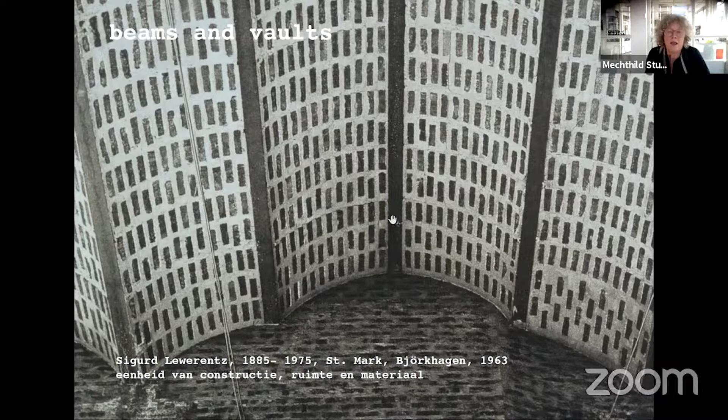He used beams and vaults and tried to understand fully what it means to use a kind of material, and try to understand what the material can do and what it can't do. And then he developed his architecture from that starting point. This is one of his churches in 1963. He was an old man already by then, in his 80s. And this was his last building, a full concrete building.

Here he experimented maybe for the very first time with making architecture with sheet materials that are basically atectonic, not tectonic. And we found that utterly fascinating. So when we got our very first chance to build something, we did an homage to this particular building because we had discovered a building material or technology that was not yet known in the Netherlands. Nobody had used it. Somebody had heard about it, but we saw it in Austria. That was this wonderful new development, CLT, 20 years ago, 2001, Rotterdam, cultural capital of Europe at the time.

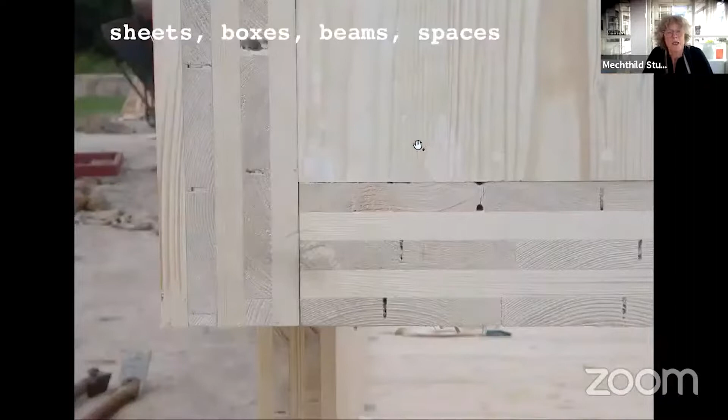This building is a little timber homage. We tried to understand what Lewerentz did. We tried to translate his concrete architecture into timber and explore shapes and forms that would only work with this particular technology. We understood these solid elements that you all know now, CLT, everybody knows CLT now, at the time nobody, but we had to find out how that actually works.

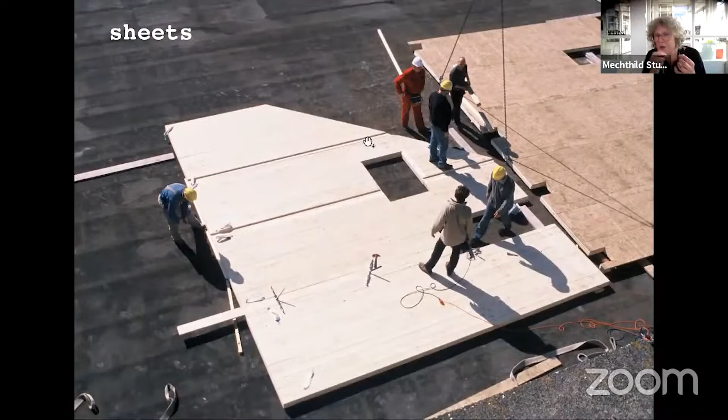We were thrilled by this discovery that you can make solid three-dimensional objects. They were completely stiff, and that could lead to a completely new kind of architecture that would get its stiffness, its stability from the way these sheets are put together. No structure and beams, no loose elements, but something that is as stable as a model you would make with gray card.

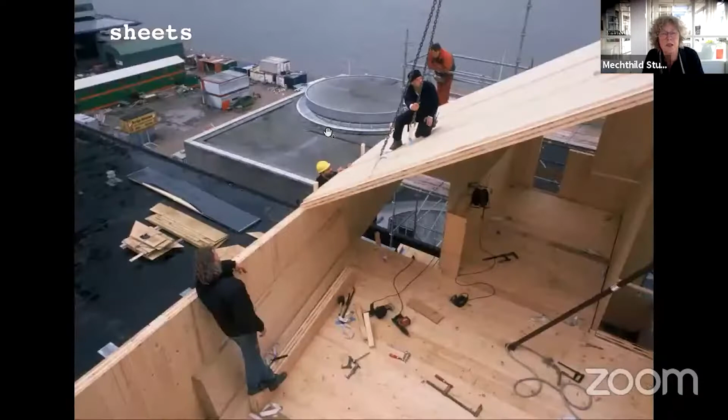It was this sensation, also this sensation that this actually felt like model making in full scale. And those four men, we still know them even after 20 years. They were thrilled at the time together with us.

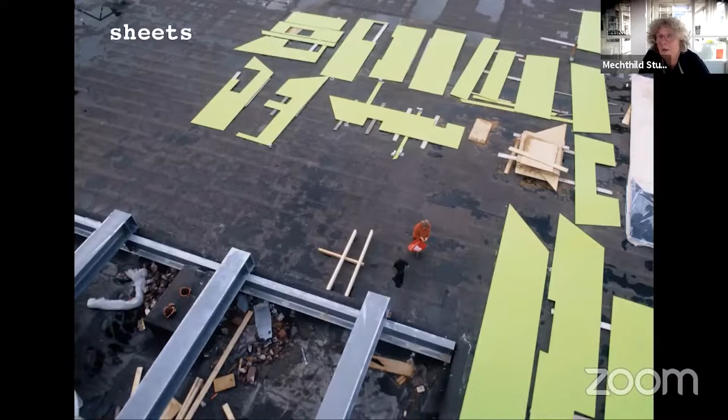The sheets, that was quite literal. We could put them on the floor and could see what was happening. And these sheets are also interesting because they were Kerto, not CLT. Kerto is a plywood, finished plywood. You can see the enormous sizes we could get. The Kerto was new on the Dutch market, and we got it for free, and that's why we did our cladding with the Kerto. And you see this quite complicated structure that was possible.

This geometry was really only possible with this sheet material structure, stiff structure, and then as a result, the spatial quality was something very distinct, not tectonic, no rhythm, no modular dimensions, a free form, a free geometry, a sort of shell where structure and space were one and the same thing. And that was exactly what we admired in the work of Lewerentz.

It was a stiff little symbol, a temporary building, an experiment, an introduction of a building technology that everyone who's now using it has, of course, long forgotten. The whole area is completely developed, but we kept it, of course, in our brains, our hearts, and it has actually shaped us as architects. It has become a very stiff thing and we profited from that. We could cut off the big staircase and ship it to its next temporary location.

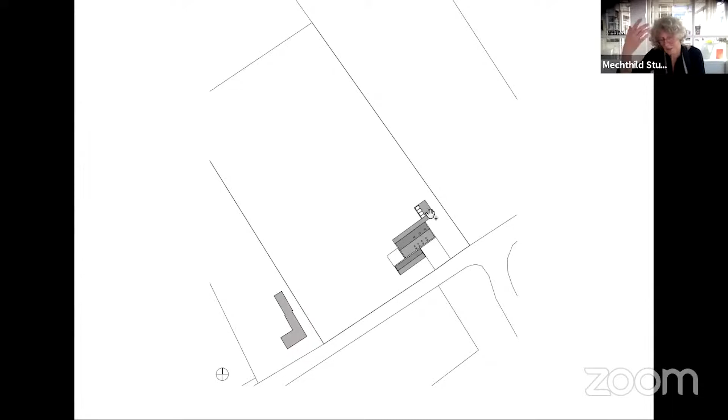A very simple little diagram of how this house has been built. Indeed, a small house in front. It's as small as all the other houses as well. A larger one in the back, and the third one, that is a little sauna. It really has been built with that.

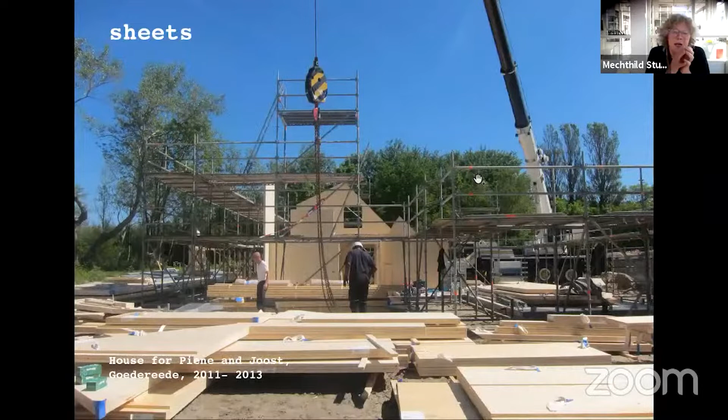And again, a very similar photograph as 12 years before with the Parasite Las Palmas. The same carpenter, still one of the few specialists of CLT. Now there are many, many more. The same guy we saw 12 years earlier. A big place where the whole assemblage of the CLT elements arrived. And a very interesting, in that case, also international collaboration.

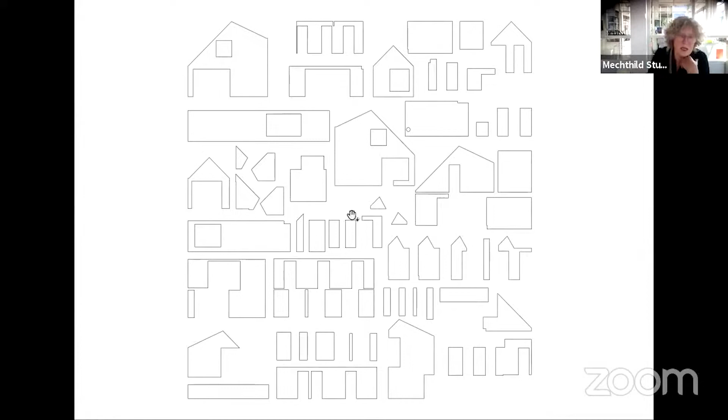The CLT sheets that make our spaces, we conceive them, but the carpenter actually draws these kinds of diagrams and really thinks in what kind of order he wants to assemble the whole thing. And then sections that were developed with the idea of spatial quality and that followed the properties of those materials.

It's a very three-dimensionally conceived house, where you see that the quality of the finishes is much less rough than in the Parasite. At that time, we didn't know the difference between the different qualities of smoothness you could order. And we knew that the timber would be overwhelming if we only used timber. So we complemented that with built-in furniture and smooth floors without a material expression.

A framed space where the absence of tectonics is used to shape the space. I think that's quite a special thing, that in CLT, you don't feel what is carried by what. It's just there. It's quite a pure space. And sometimes I find it also almost irritating that there is actually only a solid kind of mass. And we feel that we have to complement it with something that is more readable to make people feel this particular quality of CLT.

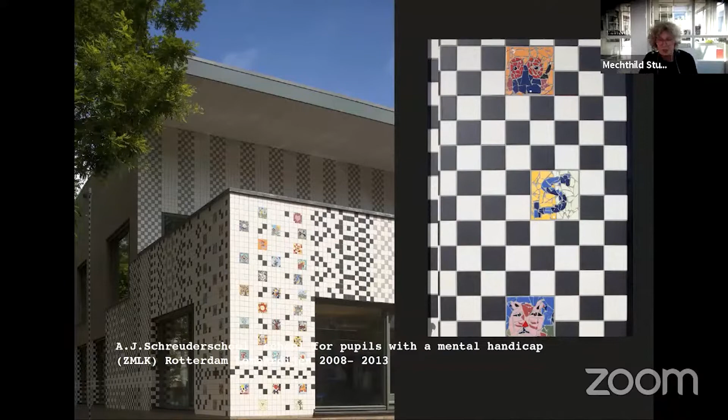It's a proud school meant for people who are usually not proud of themselves. That's why we put a big name and artworks of the pupils on the facade. But that, of course, has nothing to do with timber.

It's also a very simple plan, a very compact plan that had to do with the mental disabilities of the pupils. It had to be extremely clear and compact.

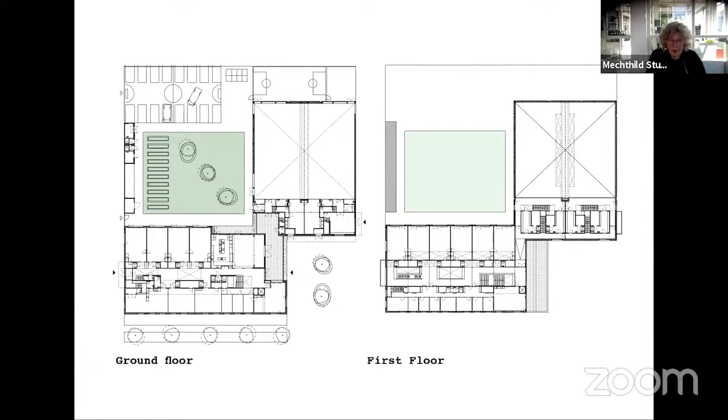So a corridor, for instance, on the first floor had to be narrow, and you were only able to go from A to B on that corridor, but still it had to be light and spacious and calm, and with very, very good acoustics. And the timber helped us with that.

Here, the sheet material was not enough. Not only because we have larger spans, but we need scale and rhythm and readability for this much larger space. And in the combination with the daylight, that structures this space.

So using beams and, in this case, hollow core roof elements, we shape the architecture, and the beams help us to bring the daylight very, very far into the building.

So if you see that, it is not only this photograph, but it is important to understand that the beams are not only a rhythm in the structure, but also that they structure the light. That's maybe more interesting than the structural properties of it.

Here you see four ways of using timber. Laminated beams, a very traditional building system. Hollow core elements that you probably know after your workshop. Lignatur in this case, perforated for acoustic absorption.

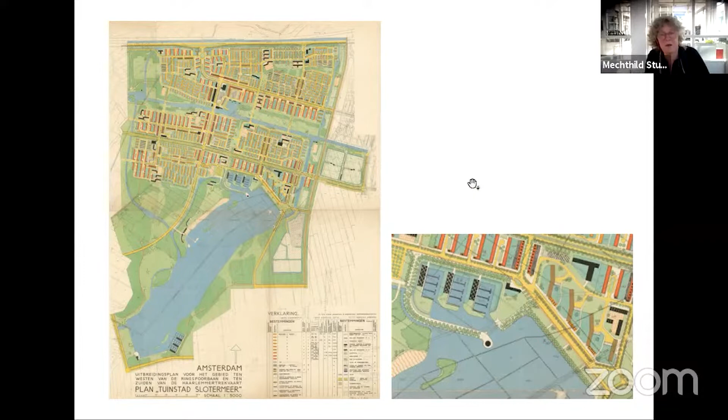Here you see the same location, this little angle here, an angled pavilion, a little building that would somehow end the axis on the lake and make the transition to the other geometry of the yacht harbor at the west. This is how the location looked when we started. It was just a dark, dense, almost solid piece of vegetation. Not much quality actually, and a little bit scary, especially in the night.

But we felt that we had to make an homage not only to Van Eesteren himself, but really also to the place. So we wanted to fit in, to hardly be seen. So we made a dark thing, like the Maidorn bushes, like the little trees. And we just do something that would not overshout. It would fit in the trees. So if you pass by, you notice the building only when you're close by.

The white modernism of the time has been replaced by black modernism because the trees have grown and we are now part of the trees, but we refer to white modernism. This is, in my opinion, maybe the nicest modernist building ever built. It's a celebration of tectonics. It's a celebration of what concrete can do. It's a celebration of light and rhythm and a combination of tectonics and nature.

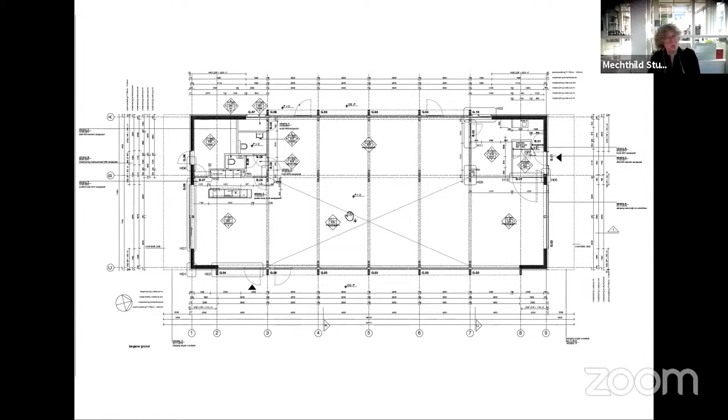And with our own innovative building technology that we have now, our own new timber technology, we can actually build modernist buildings and still be warm and contemporary. We also found this one, also an interesting reference. It's all by the same Norwegian architect, and there we went. So we made a very, very simple plan for Amsterdam, a low bay and a high bay, and it's so neutral that we can make an exhibition pavilion. It's quite simple, but the simple geometry gives a lot of space for the timber to literally shine.

Here you see what we did. We have large laminated beams and cross beams, and in between we have hollow core elements. Here you see them in section. You see the little chambers. You know the system, and you know also that one is able to perforate them. In this case, that is not Lignatur with round holes, but it's Lignotrend with slots. That's the difference. You see it in the texture here.

So this timber building, from inside, appears much larger than it looks from the outside. It's a celebration of timber. It is a celebration of new technology, like Van Eesteren would do. We use what is at hand at this very moment, but we do it in a sustainable and contemporary way. And like that, we can celebrate this architect, but also build on his legacy as someone who is innovative, always has been innovative.

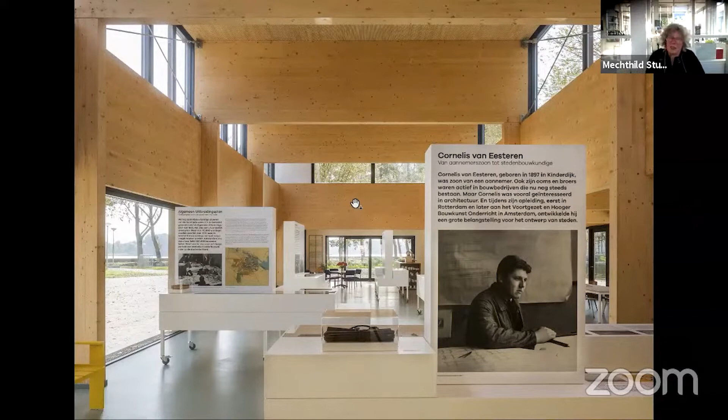He embraced prefabrication. He wanted to give light and space to everyone. He wanted to make affordable housing. He wanted to make a really, truly contemporary piece of the city, and that we had to celebrate, and timber helped us. Timber was also symbolic in that. And then you leave it, you have experienced timber, and then you are again part of the modest surroundings and the trees, and that is what this place is about.

And then this is a piece of continuous architecture, continuity where timber plays a key role to achieve this. And here, looking from inside out makes these people understand their surroundings. And that was what this was all about. I want to end with one more project. I have many images of that project, but it's going rather quick.

And here, all we learned about sheets, panels, slabs, boxes, solid timber, innovative timber, CLT, hollow core, cladding, and traditional structures come together. And that's why I dare to place it, even though it's not only about timber. It's also about that we use existing buildings. We have so many of them, and if we deal with them in a good way, the scars will always make the building more beautiful. And the longer it lasts, the more beautiful it gets. So I love this reference to kintsugi.

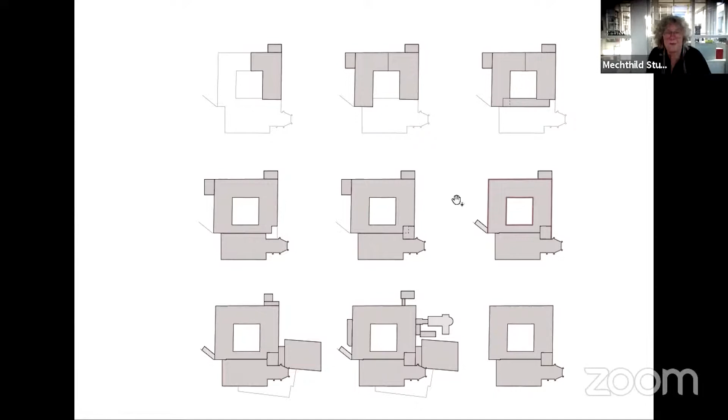Here you see, without the need to understand it all fully. It has a very, very interesting history, this building, with many alterations and many additions that were all, again, demolished. And then this is how we found it, but all the scars have left their traces. We saw it like that. And because it is a timber structure, basically, what you see is a very, very big roof. It has an enormous impact in the interior.

Yes, we still don't see any timber, but it is in there. Wait and see. On the ground floor, there is no timber. Vaulted ceilings, all brick, in a relatively good shape in some places and very bad shape in other places. On the first floor, you see already that it is a timber building, and that the timber still is okay, but everything else is decayed in a very, very extreme manner.

And then we come to the attic, where you see that the timber is actually the most, not only sustainable, but also most durable material, because that stood completely upright, proud. It's a very fantastic attic. They knew how to build with traditional means, but in almost a very grand manner. They hardly used this attic, but I found that very, very fascinating.

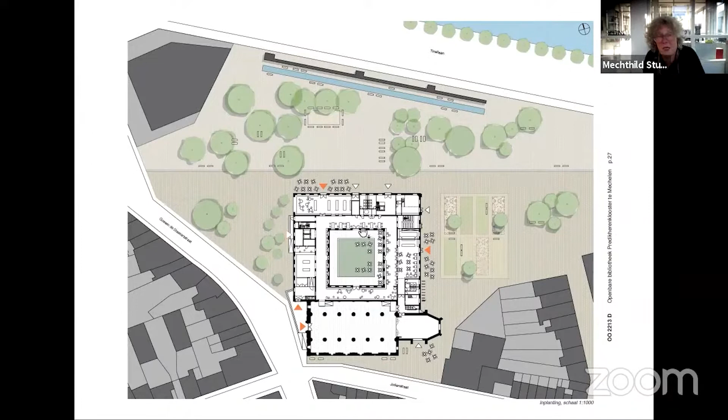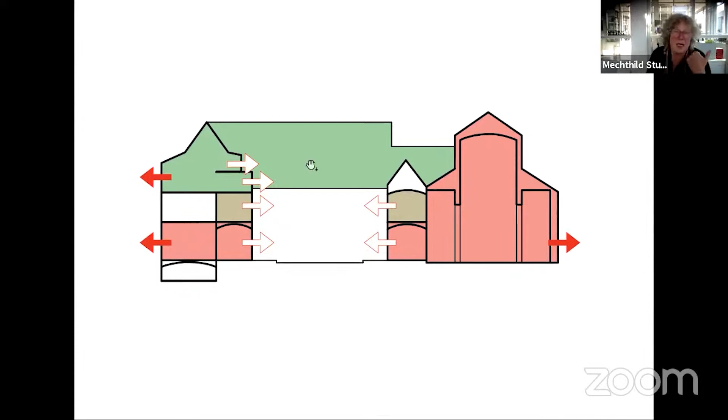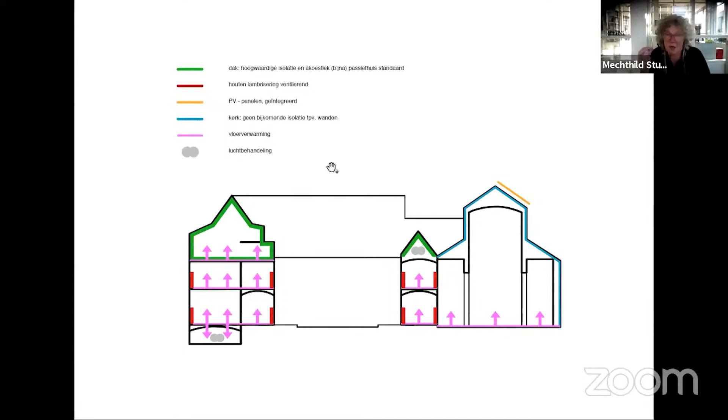And the good thing is that this whole diagram can be translated also to an insulation diagram, that the timber attic that sits on top can be insulated after a renovation and achieve passive house standards, where the stone parts are much more difficult to handle. We had to be very careful physically, so we hardly were able to insulate at all.

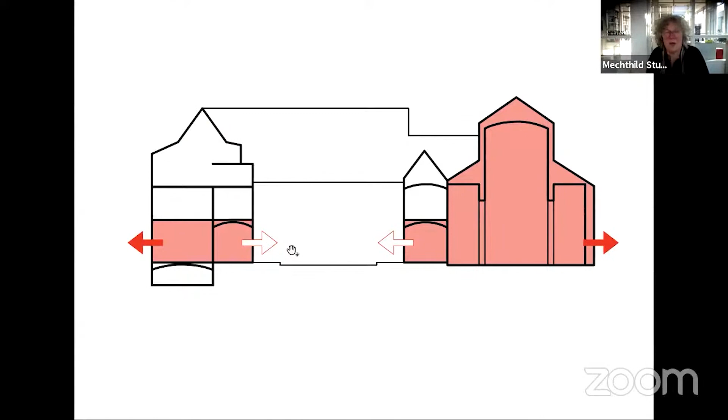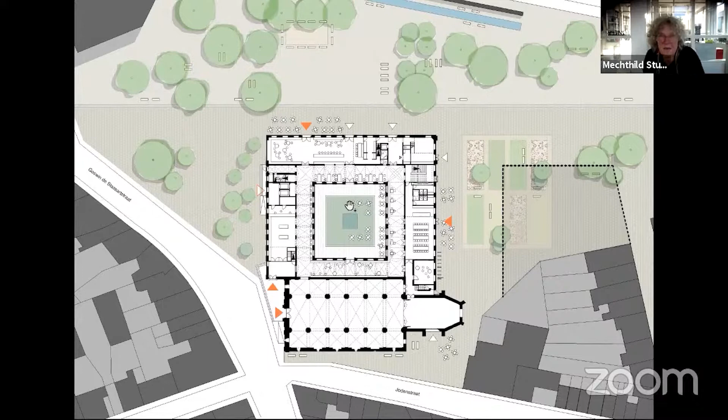I go with you to the building and start with this public zone on the ground floor, including the church. Again, the plan, where later on you see better how the plan changes from a stone plan to a timber plan, and that's why I put those plan drawings in the presentation. And you see it here. The yellow ones are the structures that have been taken away, but all the dimensions really have to do with the spans, the possibilities of the time, and that is directly linked with the possibility to build at the time in timber.

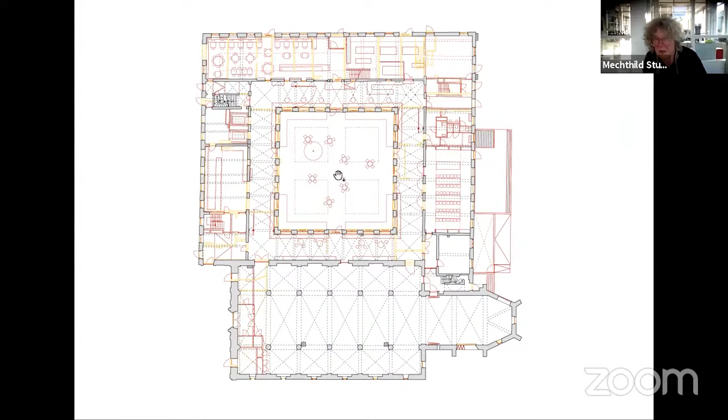The spectrum of new materials to bring in: we have solids, laminated, CLT-like structures of 3-layer plates, and the non-load-bearing ones that are the panels that guarantee good acoustics, and all kinds of other things and colors that are not so interesting in this presentation.

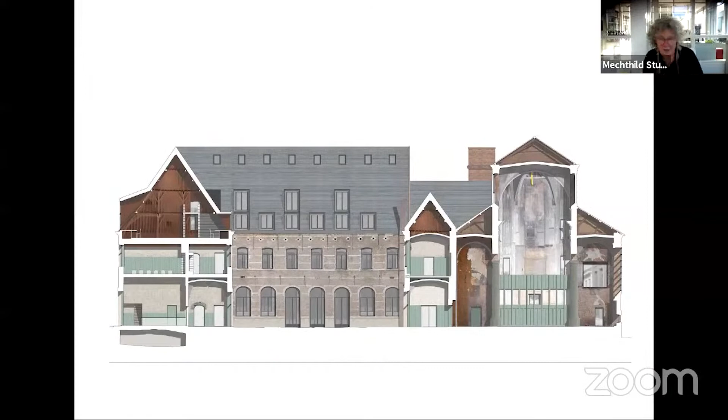But here, this competition section shows up. You have these beautiful big attics, solid timber, and then the stone building in between, underneath, and the stone walls have been lined with ventilated panelings. So the paneling was a tool to integrate installation, to integrate warmth, comfort, acoustic and thermal comfort.

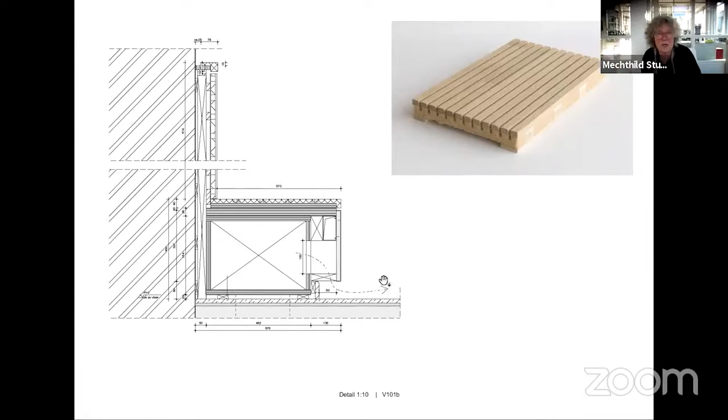In these benches, we could use our entire experience we have with the timber. And here you see this beautiful product, Lignotrend, that derives directly from the load-bearing systems, but it's much smaller, very elegant, and very easy to use, and that exists in all kinds of timber species. An oak bench with the oak paneling gives a beautiful acoustic, also in these hard spaces.

Again, you see the integration of techniques, and you see that it serves the space, but also serves the atmospheric quality of the space. Different wings, different building faces, slightly different vaulting, but the use of timber binds them all together. So we use the timber as the red line that combines all the floors of the building, all the characters, all the different wings, and all the stages of decay that you see here.

In this wing, there's hardly any plaster left. In other wings, we found this kind of heritage that we found fascinating. Of course, it's not usually regarded as being valuable, but we thought it was so stunning that we also left that, and the timber lining we brought in was subordinate. And we even colored it, partly; also that's Lignotrend, in this case a softwood, with this non-load-bearing acoustic paneling that helps us very much to control this space.

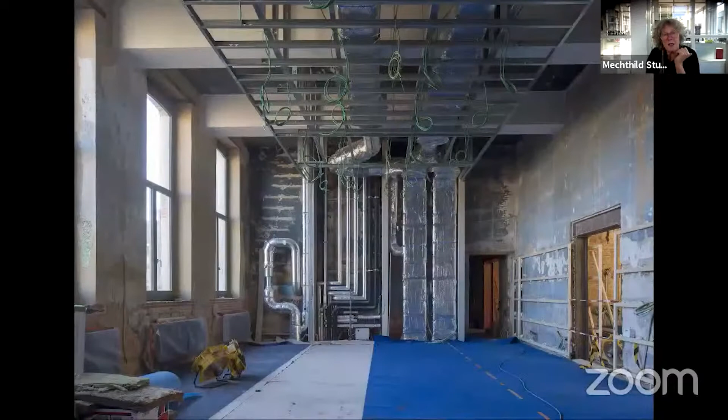The former gym, that was blackened due to fire and decay, had to hide the installations. Also, that's what you do as an architect. And then you use your repertoire of timber to conceal the techniques. So here we have again Lignotrend, but then in a sort of washy blue color.

And that has to do with the fire regulation in Belgium, that in these larger spaces we can only use softwood, because hardwood would become so hot that an oak paneling in this space was not allowed. We can talk about it a little later. There are quite specific properties of the timber. We have softwood paneling and oak doors here.

Here again, an oak panel to cover it up, softwood in a color, and then the wall that has been preserved in its very interesting blue stage. Also, these kinds of collages we enjoy a lot, and the timber, of course, helps.

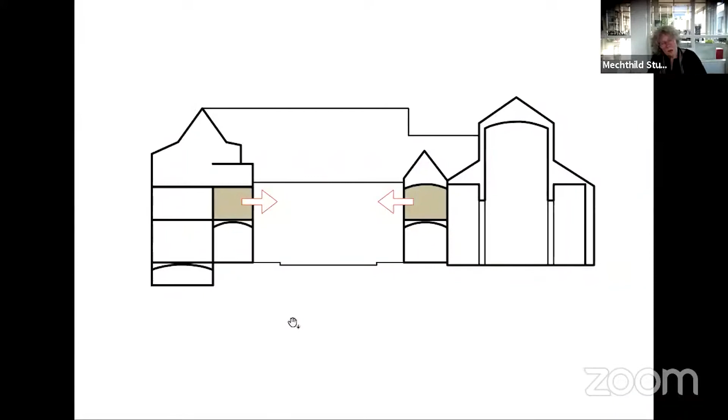Now we go one floor up to this little floor, that is the most intimate floor. And here you see already how the drawing becomes much more delicate. And that is because the attic has a timber ceiling, even though initially we didn't see it. There's a vaulted ceiling only here, and timber ceilings in all the rest. But time has almost eaten the traditional structure, not necessarily timber.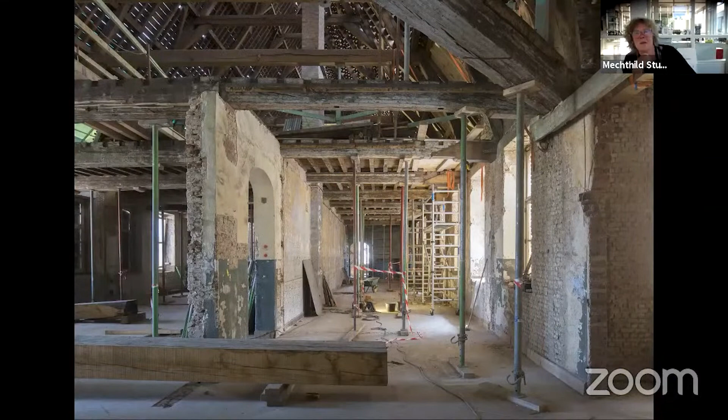And under the false ceilings, we found a wonderful composition of decayed and well-kept beams, all oak, that were already temporarily supported. And then for the restoration, we almost had to dismantle the entire building, and then the timber had survived 400, 500 years, which was remarkable. All the rest was in much lesser shape.

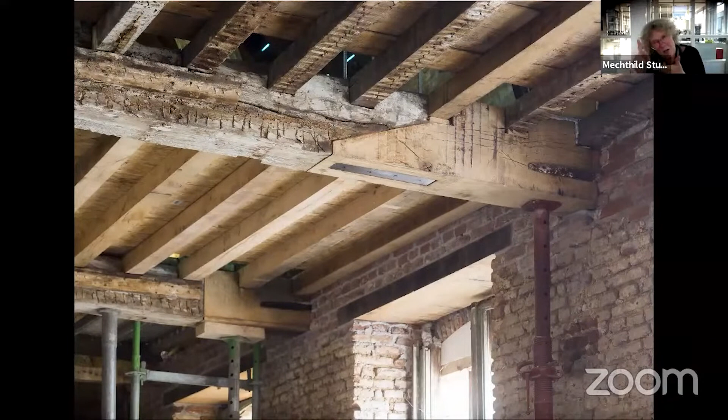The walls had been moist. So the heads of the timber beams had been soaked with the moisture, which was very dangerous. We had to replace all the heads of the structure. An interesting process, but still the atmosphere was kept. That was when it was still empty. So you see many repaired heads, many repairs, but still the timber ceiling was wonderful.

And then later they started to use it. And timber makes the atmosphere, makes the light, makes the acoustic, makes also the sound insulation between attic and this first floor. Here, the room in the corner with these monumental beams, some smaller beams, innovative insulation panels all together.

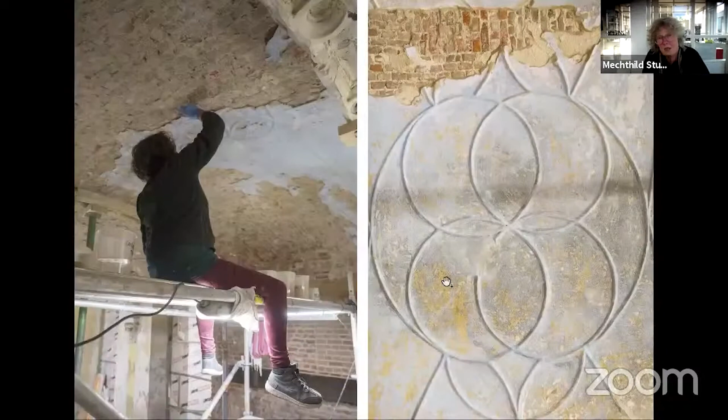Again, a few atmospheric images before we go up to the attic, which is actually the most important thing. Still, the monastery library of the monks, vaulted, had suffered a lot from decay, from moisture. Five years ago, it still looked like this. We restored it very carefully, but didn't reconstruct any ornamentation. And then the timber furniture accommodated also ventilation pipes.

You see that on the bottom. It's all in there, and acoustics on the wall. Also, that gives us a little thermal comfort. And now it has been accepted as almost a public living room to study there.

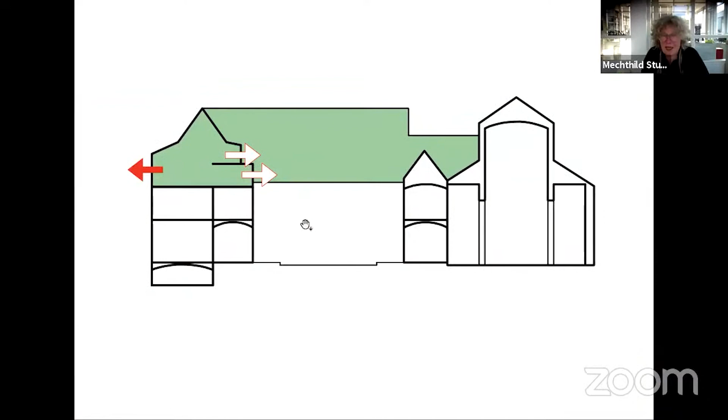The last floor, also the last project I show you, is this attic. See, again, the plan, very, very delicate. It becomes thinner and thinner and thinner if you compare it to the lower plans. And that's because of the timber. We introduced a mezzanine, and I just show you the images. This is what we found. And if you see the broken down, the rundown monuments, it is remarkable how well it was kept. So timber structures can last for a long, long time.

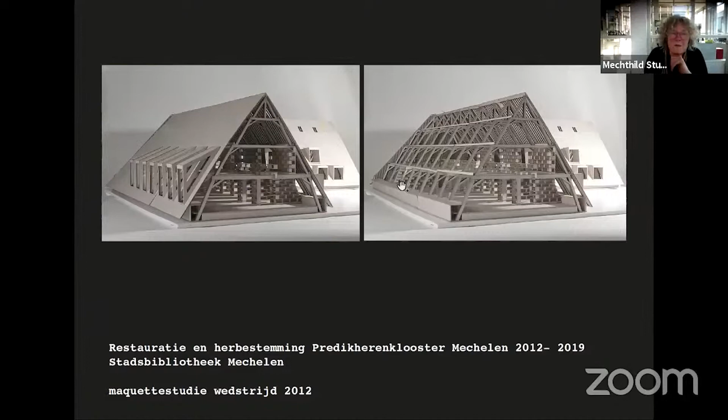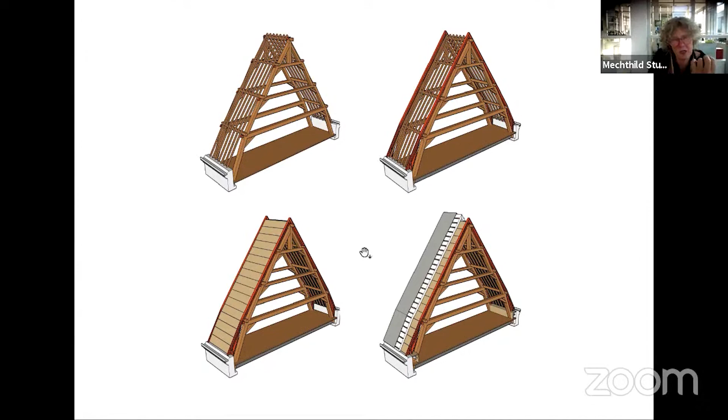For the competition, we built extensive models to understand that well. We developed ideas that were almost executed like that, how to preserve this attic where nobody can calculate that anymore. We have to repair things, we have to insulate, we have to put more light in. So we invented a steel structure on top that would help us to make a hybrid structure that would allow us to preserve the entire interior attic.

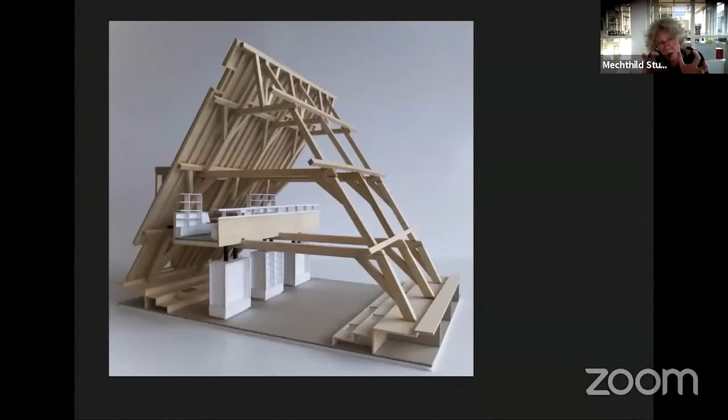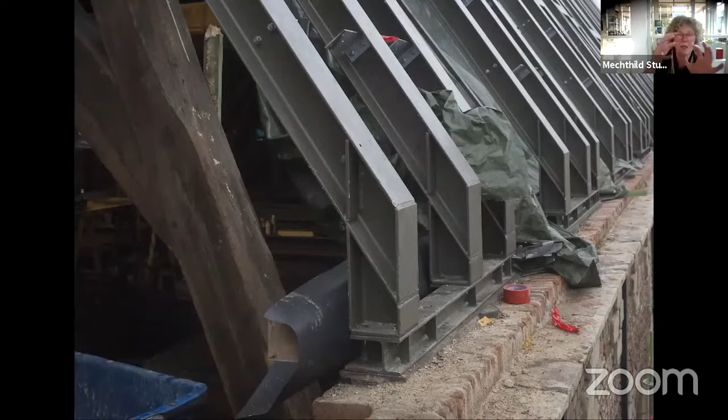This hybrid structure, the supporting structure was steel, so these two work wonderfully together. To understand what we wanted to do, we studied this. This is the in-between wall with the little steel columns, but then you see this monumental timber structure. And that is how it has become. So we hardly see that something has happened, but there's a lot on top of that. The steel structure keeps the timber alive.

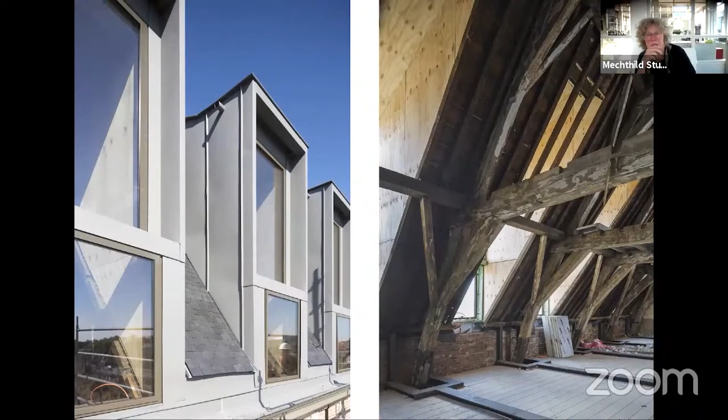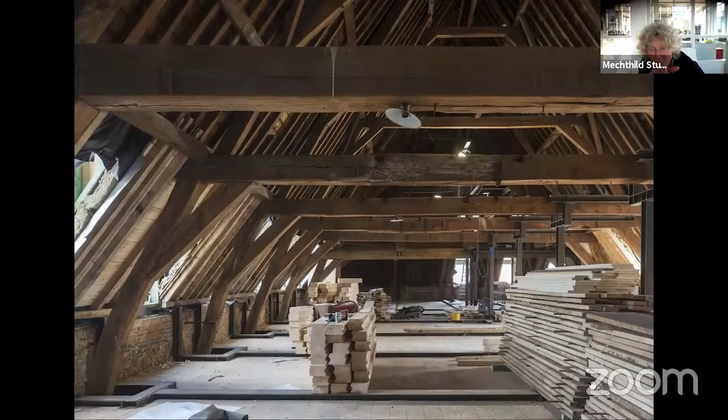The steel structure supports the new dormer windows that again support a smoke exhaustion system, new daylight, and make it possible that we use this attic. But then you see that we also have supporting steel beams in the floor, and they carry the Lignatur floors. There's a solid timber floor between the first floor we saw and the attic. So that's how this whole experience with earlier and innovative systems really arrives in this very atypical restoration project.

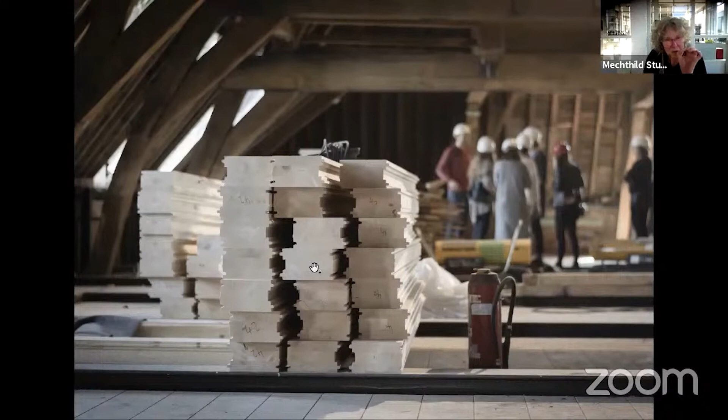You see here solid Lignatur elements. They're not hollow because of the weight and because of the role of this not only as a load-bearing floor, but also as a fire separation. That makes me particularly happy, that we now are able even to use solid timber to separate, for the fire police, for 90 minutes the attic from the first floor.

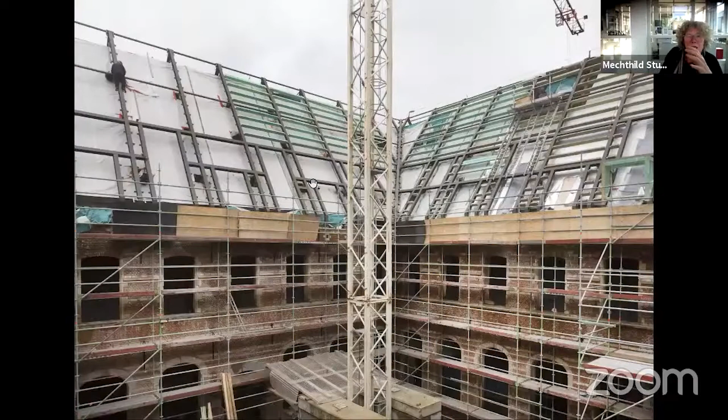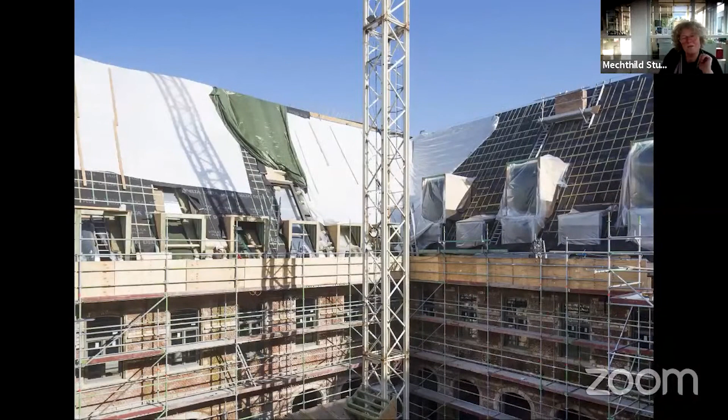Small, and just an idea about this quite spectacular structure that nobody sees anymore. And then it was hidden and it was forgotten, but we know that it's there. The invisible steel structure that made the building a little bit higher than it was, but that is almost not to be noticed. That went a little bit fast, sorry, but I noticed that it is an attic that almost looks like it was, a lot lighter, very well insulated, and fire protected, fire safe.

We used again a similar lining as we used in the school. You see that? We used the timber, also oak, to make furniture, lots of furniture. We concealed the ventilation pipes like in the benches downstairs with this reading tribune. Wherever you see those kind of benches, it's because of the ventilation pipes. Somewhere they have to go.

Sometimes we can't resist doing something different than timber. A steel stair, but still with timber steps. And then this attic requires the whole knowledge of innovative timber structure in order to achieve an unnoticeable renovation. Attic dormers are lined with the LignoTrend lining.

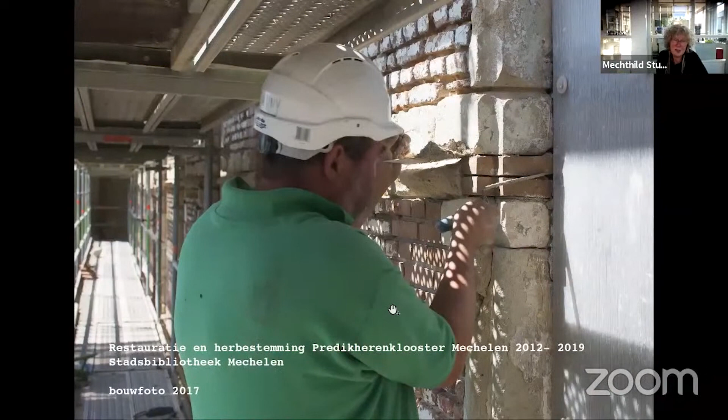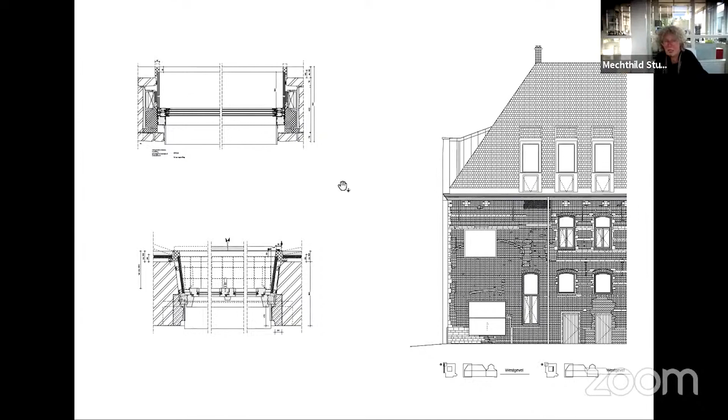I don't explain the facades at length. It's only done with a lot of care. There again, the difference between the timber window frames, these are the very reconstructed old timber frames, and the new ones where we use steel, they make a very significant difference. The new window and the new opening that we cut ourselves, and the timber frames in an old opening where we did a reconstruction.

We made a book that is easy to order or to borrow at the library, our library. And now what's only left is the church, and we will build a beautiful natural balcony in there to be able to use it in the future for cultural purposes.